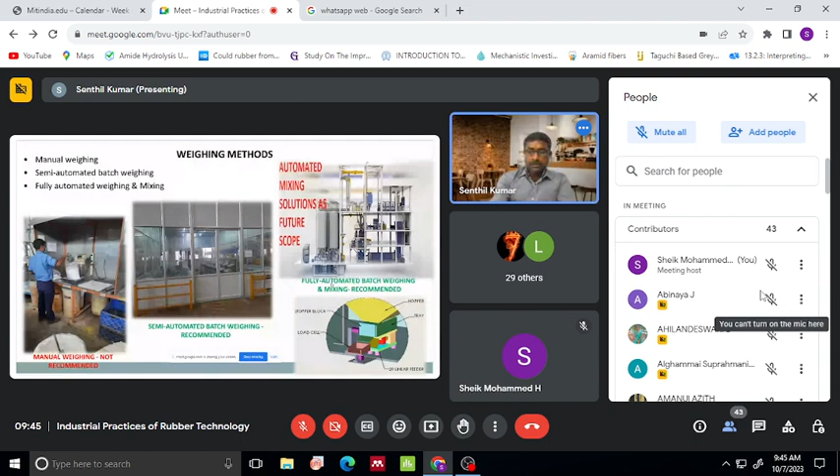Right? So this, as you know, you know better about the roll mill. You are using it in your laboratory also. So I don't want to explain in detail about what is intensive and dispersive mixing. Just I wanted to show the whole nomenclature, right? So as we know, there is a fill factor. Fill factor is also one of the important things for maintaining the compound quality.

If your machine is having a capacity, right? So you have to understand the capacity of a machine, made in Banbury, in terms of volume. Right? So if you are understanding the capacity, then the weight, that is your compound, should be loaded appropriately so that the dispersion will be better.

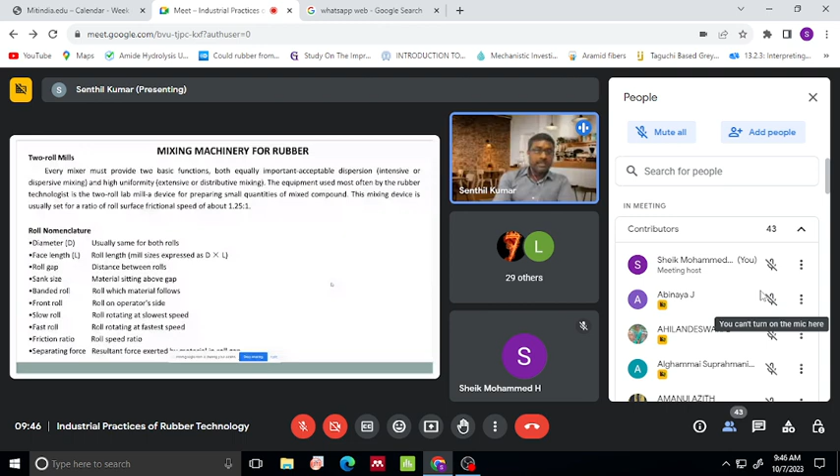As there are three phases of mixing: incorporation, distribution, and dispersion. So you would have been aware about it. So all these three phases will be in a maximum positive manner when you maintain the fill factor. If the fill factor is not maintained, then all your three will fail, right? So this is one thing. It is a roll nomenclature.

And here you can see an example of a Banbury mixer and integrated mixing mill. So this is a typical view of a Banbury mixer, where the operator will stand here and he will be loading all the rubbers, chemicals, process oils, fillers, curing agents, accelerators, activators, all the ingredients you are going to use. All those things the operator will be adding here.

So this is a typical view, and here you can see this is a RAM, right? This is a hopper door. When the hopper door is open, then all the rubber, chemicals, oils, all the things are filled. We will be following a sequence of mixing. So when the mixing sequence is appropriately followed, then definitely the mixing will be good. So this is a typical view of a 40-liter two-wing rotor design for Banbury.

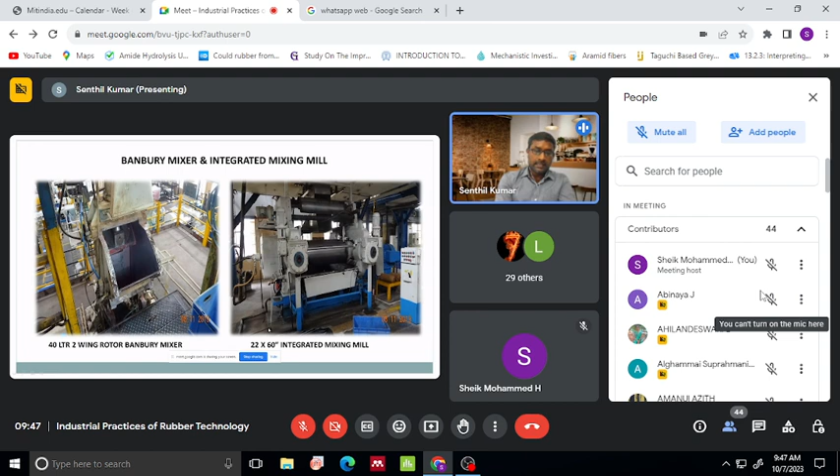Right. So why I am calling this an integrated Banbury: here you can see a chute. This chute is integrated to this Banbury. So when you finish your mixing process, that will be dumped on this mill. This is a door opener. So when it is dumped on a mill, then there will be a standard operating procedure for ensuring good dispersion on the mill, right? So this is a 22 by 60 integrated mixing mill, just for review.

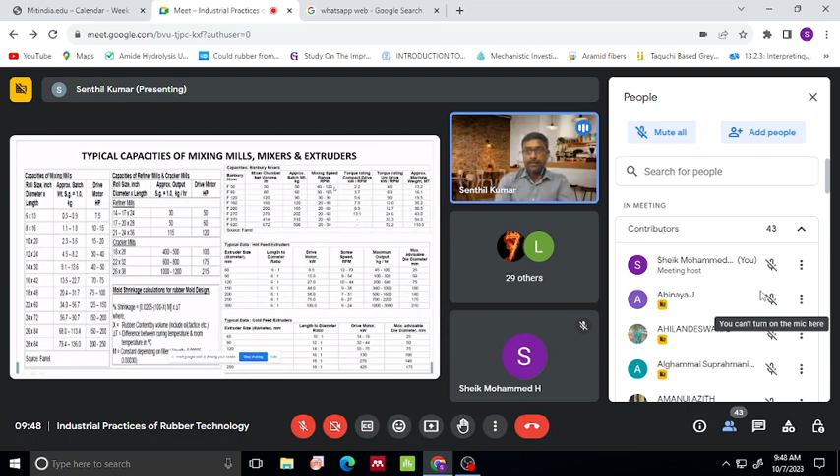So this is a typical capacity of mixing mills, mixers and extruders, just I wanted to show you, that's all. So no need to spend more on this slide. It shows, if you are going to procure an F50 Banbury mixer, then the chamber volume will be this, and the batch weight will be this, and the maximum RPM of the rotor we can follow, and torque and motor and gearbox, all those data will be given here.

Right? So here, Sheikh Mohammed, am I audible?

Yes, yes, you are audible. You can go. Audible, right? Yes, yes. Right. Okay, fine. Students, from the student side, am I audible and am I clear? Do you want to change my language or something, if you wish? From student side. No, sir, it's about you. Right, am I audible? Am I clear?

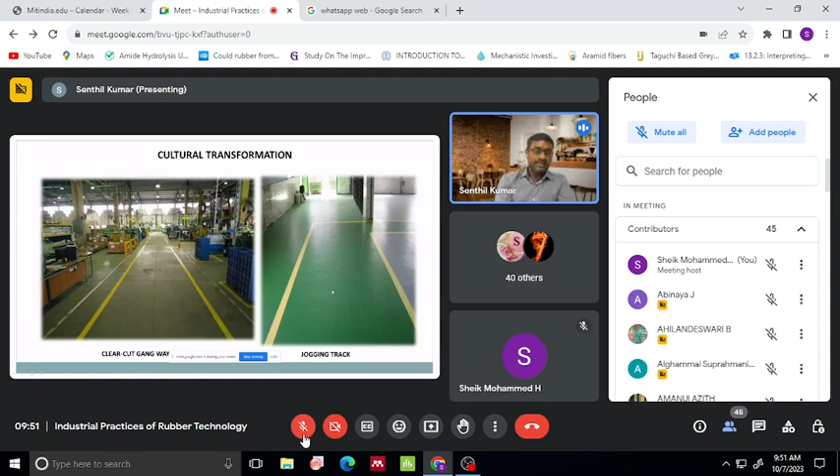Something not required today, but it may be required tomorrow. If that is so, you should not practice that culture inside the shop. When you start practicing it, you will be a little lazy and you will not look at it tomorrow. Then it will be stagnant in the same place. So that practice should not be done. For that there is a term in TQM called jogging track, where you should mark some 600 mm from the wall so as to maintain cleanliness in the shop floor.

I told about low cost automation initially when discussing the steps in TQM, right? Here there is a low cost automation where you can see an arrangement of a pneumatic cylinder. It is a small setup with not much investment. As a shop floor person, you can think differently. This is an extrusion line. In this extrusion line, the hoses or tubes are extruded, and before, people would use scissors or a knife to cut them manually to ensure the length of the hose.

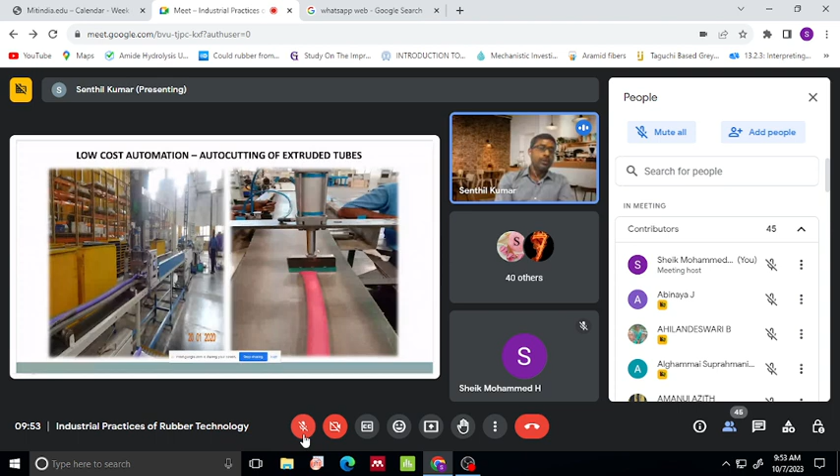So here they are using a cylinder with a small investment, maybe less than 5,000 or 10,000. They have taken some internally available accessories and done a small improvement, and with this we can ensure a uniform length of the hose cut. This is called low cost automation, termed as auto cutting of extruded tubes. So this is one thing I would like to share. And here is another example of low cost automation.

When there is some metal impregnated rubber product, there is a rubber component along with the metal. Here you can see there is a metal tube which should be passed in the extruder line. Manually, it will be pushed by an operator inside the extruder line. And when you are pushing it inside the extruder line, once again it depends on man. So the man will not push it with the even load, right?

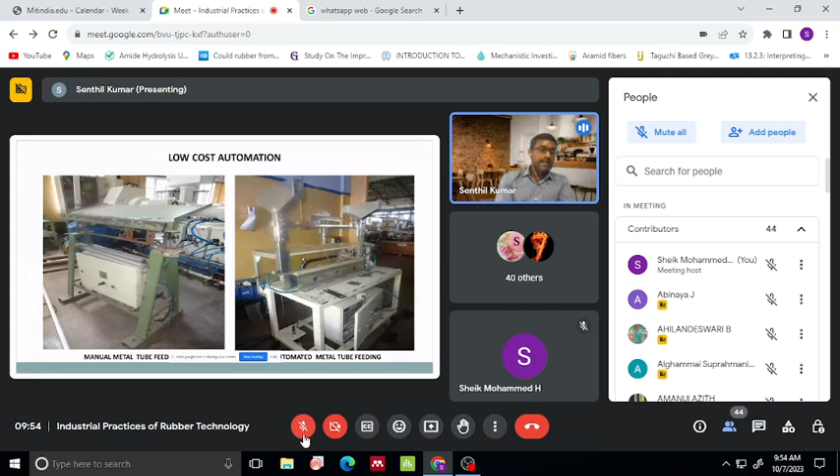When the load is varied, when your force of pushing is varying, then definitely when it is coated along with the rubber compound, there will be a variation in the thickness, right? So these things we need to avoid. And here what we have done, here you can load all the metal tubes, and there is a systematic PLC arrangement done to ensure each and every tube will be pushed with the pneumatic cylinder inside the head of the extruder, so as to maintain the uniform wall thickness of the rubber component along with the metal.

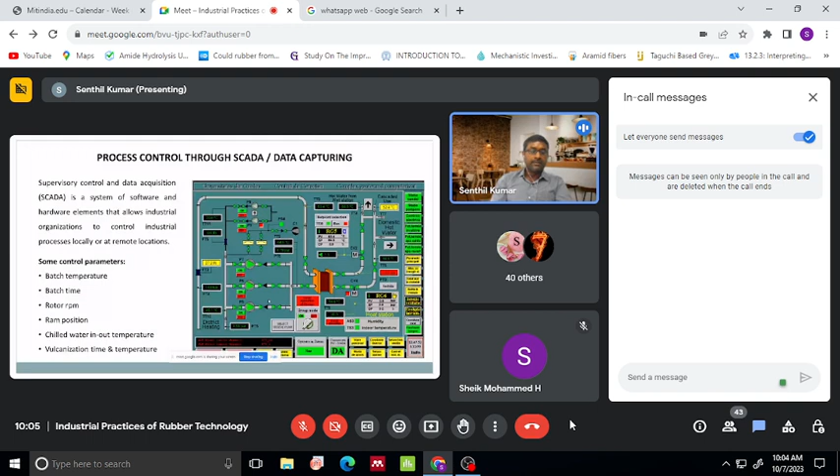So when we do it manually, there is an error continuously. If you are implementing this SCADA system, it is a small PLC control system. When you implement SCADA, your curing will be appropriately controlled. So curing is an important thing where your product is converted into rubber. Before that, whatever design and formula you have given to your software, when it is cured properly, the product will be as per the intended requirement. So you have to ultimately give focus on curing also.

This is a PLC controlled SCADA process where there is vulcanization, and the problem here is there was no data capturing system before for the rubber component, so the process could not be ensured for right quality. So the action taken is we implemented SCADA, a data capturing system. Finally, when curing is done properly, if you are facing some issue where the customer says we are facing crack issues in your rubber component - there may be other factors also, but you should have a grip, having evidence of data captured in your SCADA or data capturing system.

So here you can see there is a temperature of 138.6, and here is also a temperature. This means there are some 3 to 4 different autoclaves in the organization, and all the temperatures are being followed. This can be monitored online, and can also be recorded as evidence. So when there is a customer complaint, we will understand the complaint, and based on it we will know, okay, it is a crack. If it's a crack, the first thing that comes to mind is whether the product is undercured or overcured.

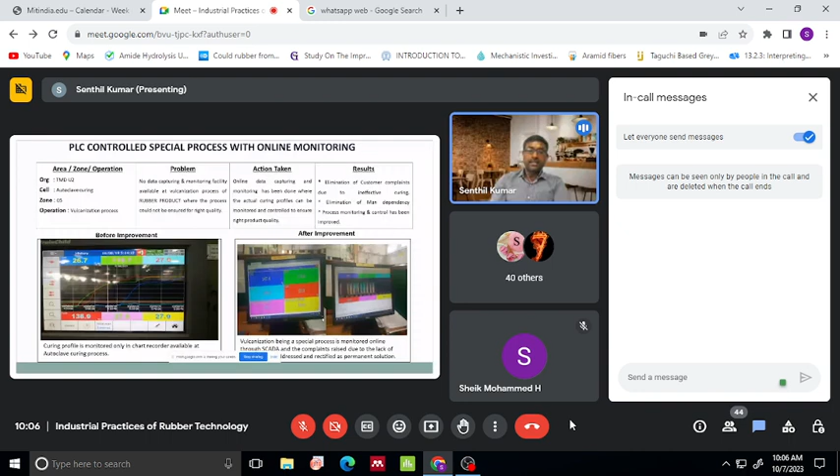When it is overcured, there may be an increase in the temperature, or there will be some manual error done by the operator. The steam will not get into the autoclave properly or on time, or the curing time is a little more because there is a malfunction in the machine. So many issues are there in the process. So when you are creating a robust process by implementing this SCADA system, your process will become stable.

These are all the temperatures for all the autoclaves, and here is a curing pattern that you can monitor online. The process starts here, and from here the curing starts. There is a step here, and as I told you, if you are going for a step curing, here it is up to 130 degrees centigrade for example. We have to maintain some 20 minutes or half an hour of curing time.

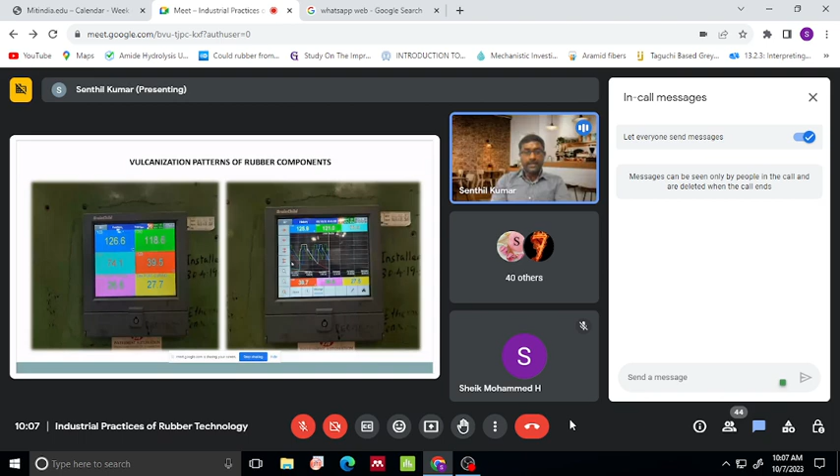Then remaining, you have to go for 150. That means the steam will be raising for the next 5 to 10 minutes. Then it will be some 20 minutes to be maintained at 150. So there is a curing pattern you can monitor in your day-to-day shop floor, and finally, based on this profile, you can understand how your curing is done. So this is one thing.

I will complete in a few minutes. This is DMAIC, which is part of Six Sigma. Six Sigma is a vast area, and DMAIC stands for Define, Measure, Analyze, Improve, and Control - there are 5 phases.

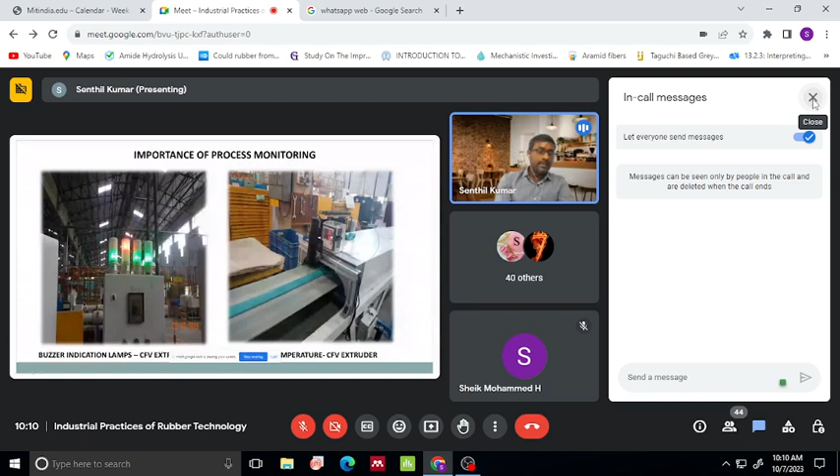These are small improvements you can make in your process. This is a CFV extruder - cold feed vent extruder - with a tube extruder and a monitoring system. The process requires the temperature to be only 50 degrees. If it shows 50 here, that's correct. When it goes beyond the limit, we have to go and correct the process - that is the process monitoring system.

Here there is an autoclave meant for curing. When it's green, many people push rubber components in awaiting curing and close the door before the curing cycle starts. But the previous curing cycle's temperature will not have fully cooled down, maybe still at 60 or 70 degrees. If you push the load in without starting the cycle, the curing starts slowly and unevenly, which is not a good practice. So if this green lamp is indicating, that means the process has properly started.

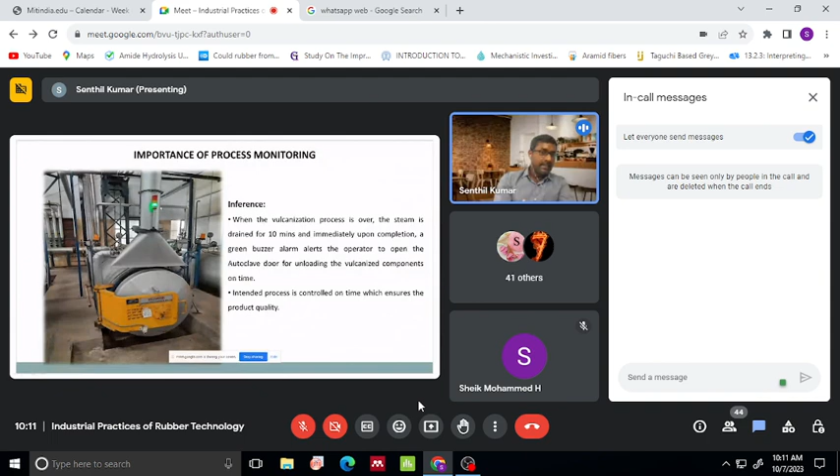This is a small indication and improvement you can implement in your process.

Then you analyze, using the 5 Why analysis as I explained in the DMAIC slide, to find the root cause. For that root cause of the problem, you take a countermeasure - like the indication system I implemented, as I mentioned.

Before that, the operator will be closing the autoclave door, and he will not start the curing. Whenever the load is given inside the autoclave and the curing is started, then definitely this green lamp will indicate, otherwise red lamp will indicate. So this is an alert given to the operator. It is a kind of action, right?

So when you are taking an action, you have to check the side effects of that process. So that will come in the check phase. Then finally, as I told, all the checklists and whatever standards you have, you have to update it and standardize the process. And finally, you have to come up with the result. So this is a step-by-step tool of addressing a problem.

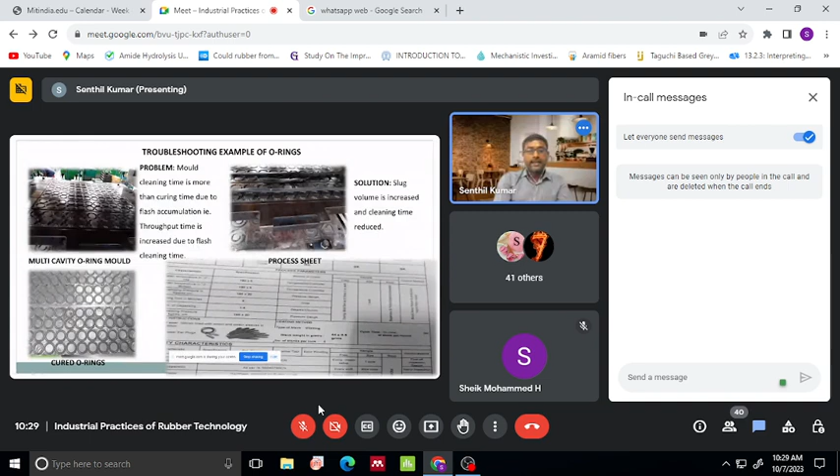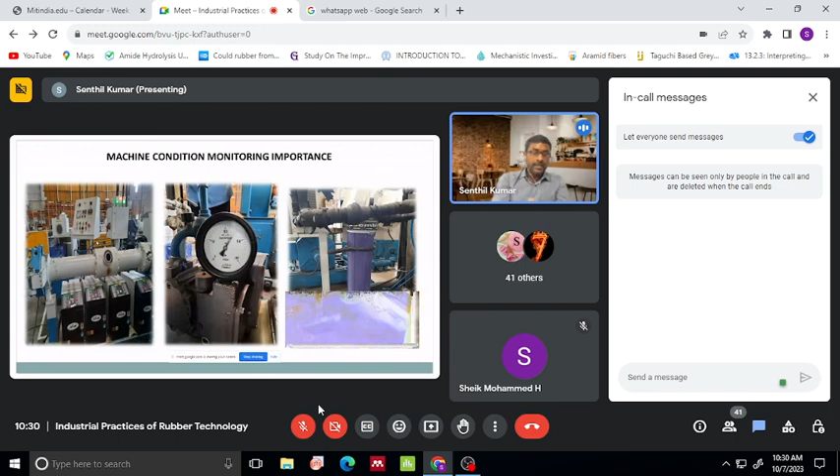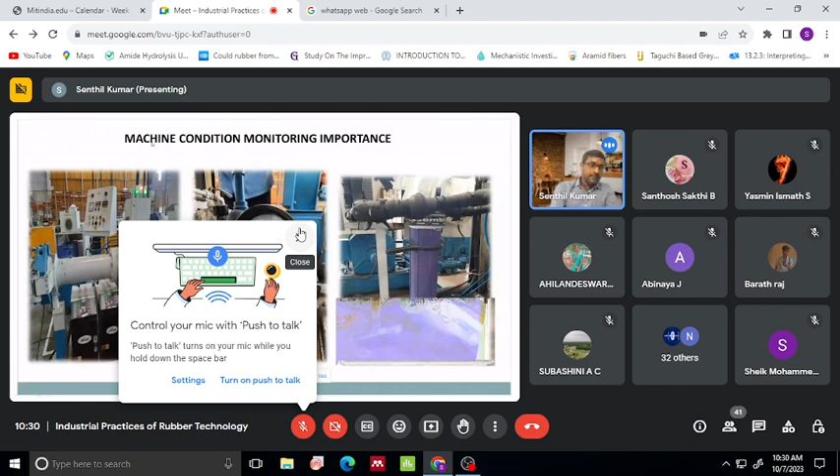So we have to keep all this in mind and work in a process. Finally, machine condition monitoring: this is an extruder, and when extrusion is happening there will be some air pockets, right? If air pockets are coming because the mixing is not done properly, the gases are not evaporated, degassing is not done properly, that will be included in the product's quality. அதாவது air pockets ஓட உங்களுடைய ப்ராடக்ட் வெளியே வரும். So this is a main unit called a vacuum pump, which will be maintaining a vacuum in the extruder machine.

So when this is not set in a particular specification, then definitely that entrapped air will be coming. Correct. So in that situation you have to monitor this vacuum pressure continuously. And here, see, this is the extruder chilled water line, right? In the chilled water line, there is a spec for maintaining the temperature of the chilled water. Then the water should be contaminant free.

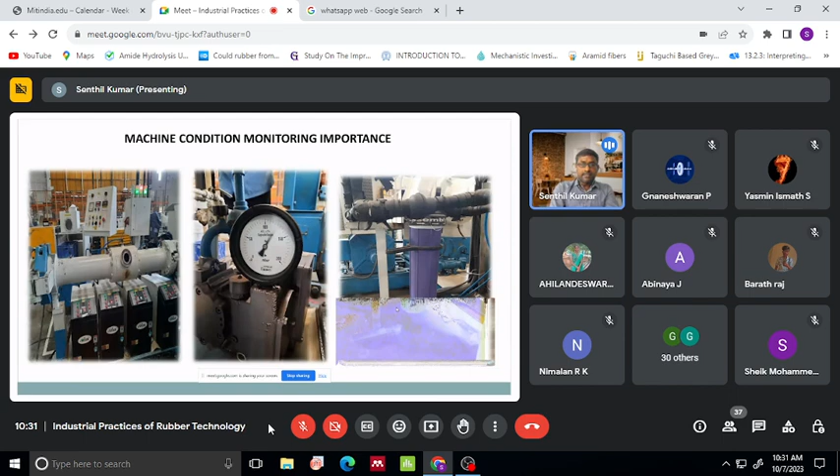Like now, if you go with chilled water, contamination can come, or in the pipeline the corrosions will happen and finally your water will get contaminated before getting into the TCU. TCU is nothing but temperature control unit. When it is entering into the TCU, it will not function properly and temperature variation will be there, right? So in that case the water quality is deteriorated and the functioning of TCU will be improper, deviating the process.

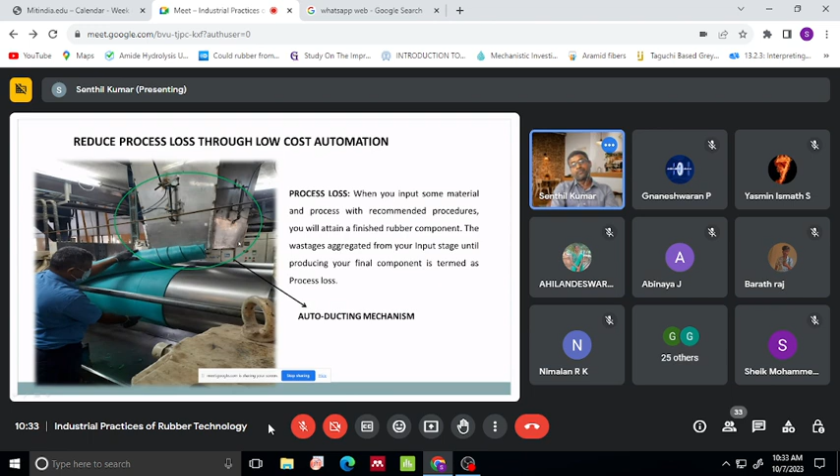And this unit will come down, ensuring that there will not be much wastage during the mixing process. So this is one thing I would like to share in the low cost automation.

Overall, I've given a comparison about total quality management and what is the importance of quality to be followed by a shop floor person. Because as a rubber technologist, we should focus on complete processes. We should understand the processes. Then only we will be able to give a high quality product. So this is the main thing I would like to share in this overall presentation. And this is what a TQM approach is.